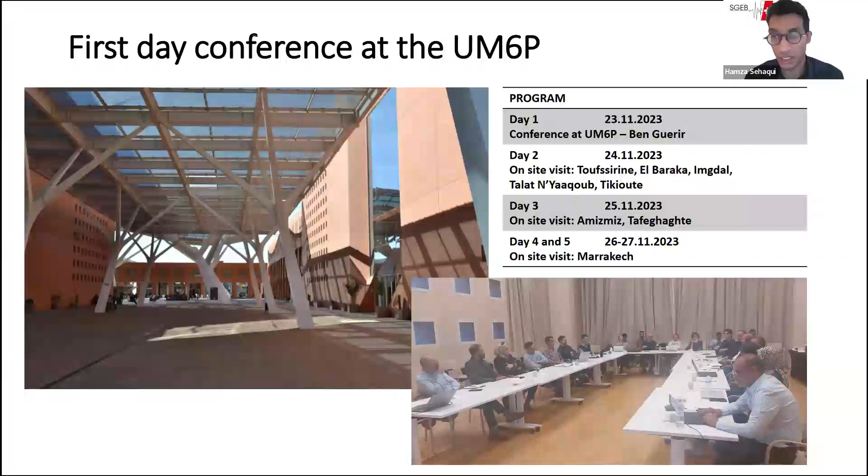Then during the following 4 days, we had the opportunity to visit villages that were badly affected by the earthquake, mainly within a distance of 10 to 40 kilometers from the epicenter. The second day we visited Toufssirine, El Baraka, Imgdal, Talat N'Yaaqoub, and Tikioute. The third day we went to Amizmiz and Tafeghaghte. And the last 2 days, we observed the damages and also some reinforcement measures in the old city of Marrakech.

Just as a reminder, the earthquake struck Morocco on the 8th of September 2023. The epicenter was about 70 kilometers southwest of Marrakech, with a magnitude of around 7. It was so strong that it was felt all over the country. And it happened at 10 o'clock in the evening, when a majority of people were at home, some already sleeping. There were more than 2,900 deaths and 5,600 injuries.

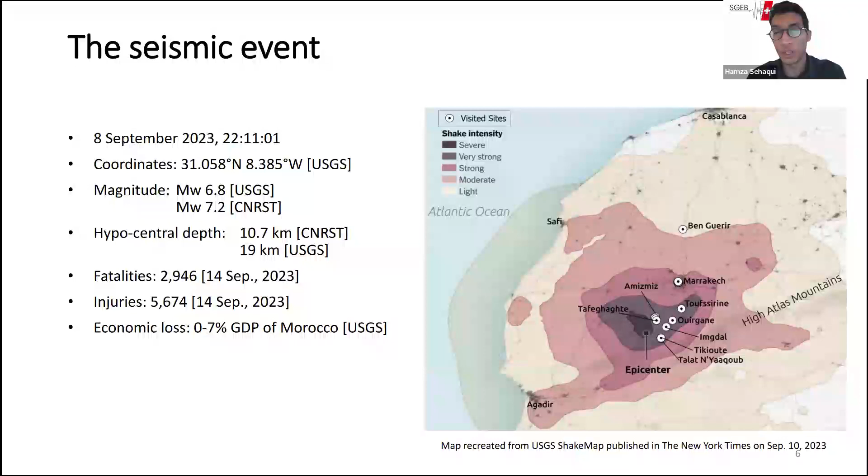Also, the location of the epicenter made the rescue a bit difficult, since it was in a region where access was really difficult due to multiple landslides over several kilometers.

For information, Morocco has seismic codes, actually two. Le règlement de construction parasismique, RPS, which concerns mainly concrete frames and mixed concrete masonry walls. More precisely, concrete frames with masonry infills. And the other code is the Règlement parasismique des constructions en terre, which concerns adobe and earthen structures.

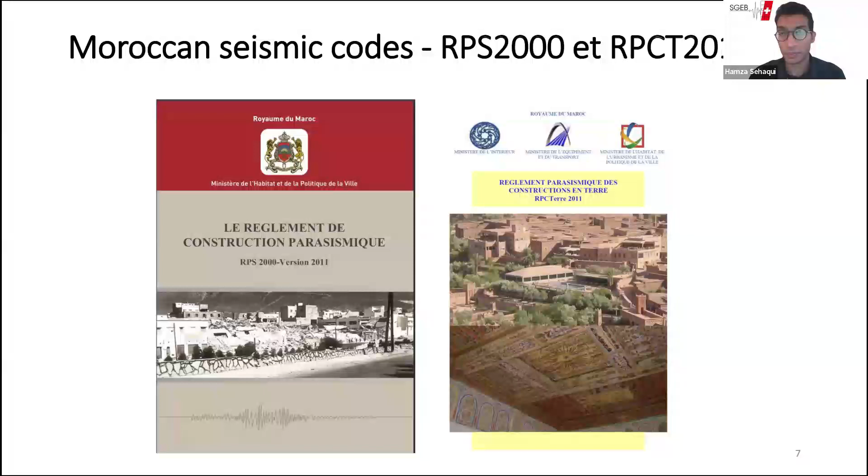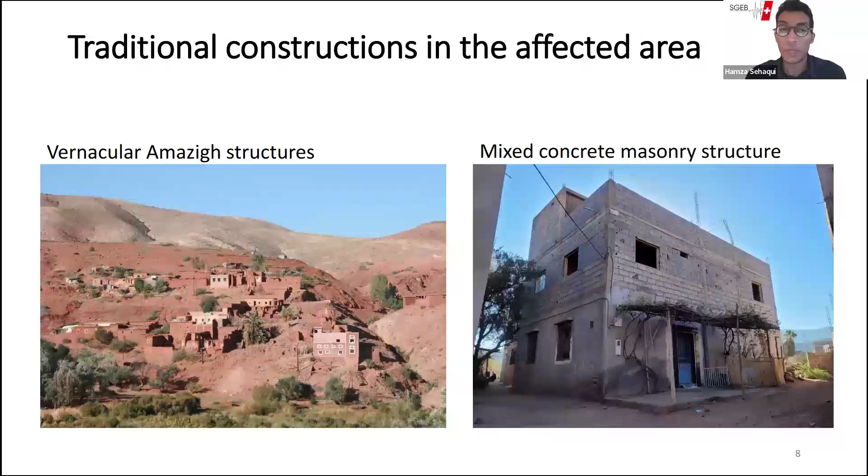Here are the most common constructions that we met in the High Atlas region. My colleagues will introduce these structures in more detail, but before that, Afifa from the Swiss Seismological Service at ETH Zurich will present the seismological and site aspects.

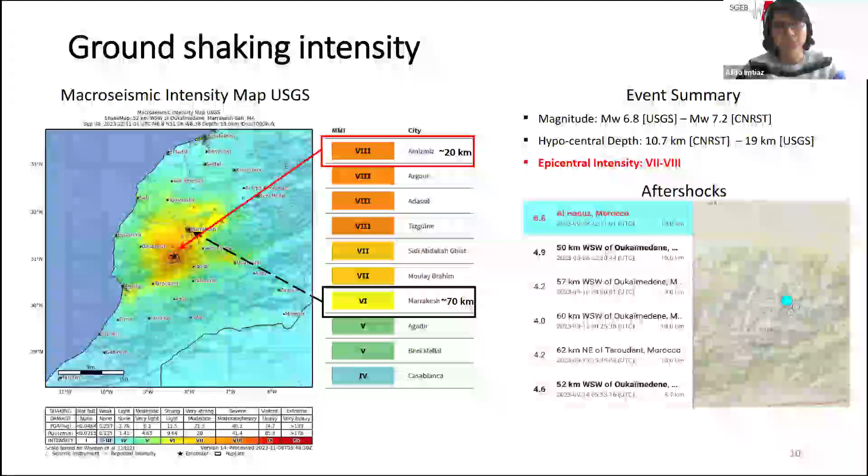On the right picture in gray circles, we see the locations of the aftershocks with magnitude above 4. The main shock was followed by a magnitude 4.9 aftershock just after 20 minutes, which also contributed to damage. Next is the PGA distribution.

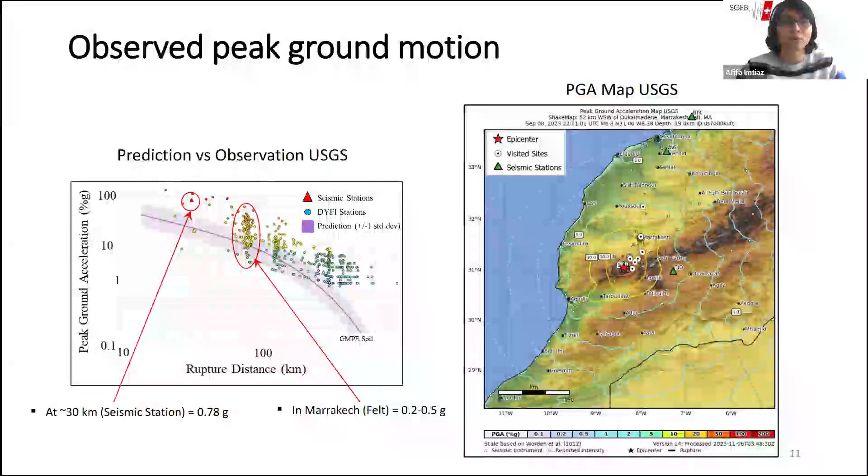So USGS compared the observed ground motions shown by circles and triangles on the left figure with the ones from ground motion prediction equations for soil, shown in purple. We see that the observations generally exceeded the prediction. The ground motion reached up to 0.78 G at a seismic station 30 kilometers away from the epicenter and was felt up to 0.5 G in Marrakech. On the right, we see that the sites we visited fall within 0.2 to 0.5 G contours.

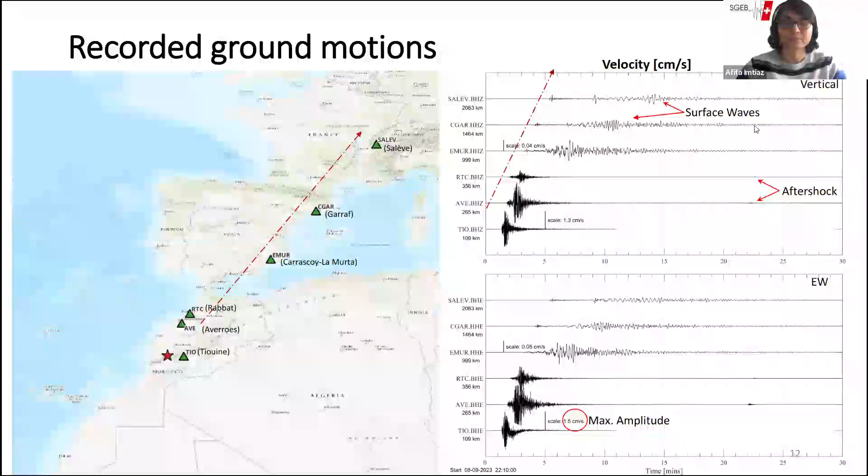Next, I show some recordings of the event. On the left, I show some stations from European networks. The closest station, Tiouine, is about 100 kilometers away from the epicenter and recorded a PGV of 1.5 centimeters per second. The 4.9 aftershock also appears on the seismograms. And as we go northwards from Morocco through Spain until Salève near Geneva, we can distinguish P, S and surface wave arrival phases more clearly. Next slide shows the response spectra comparison.

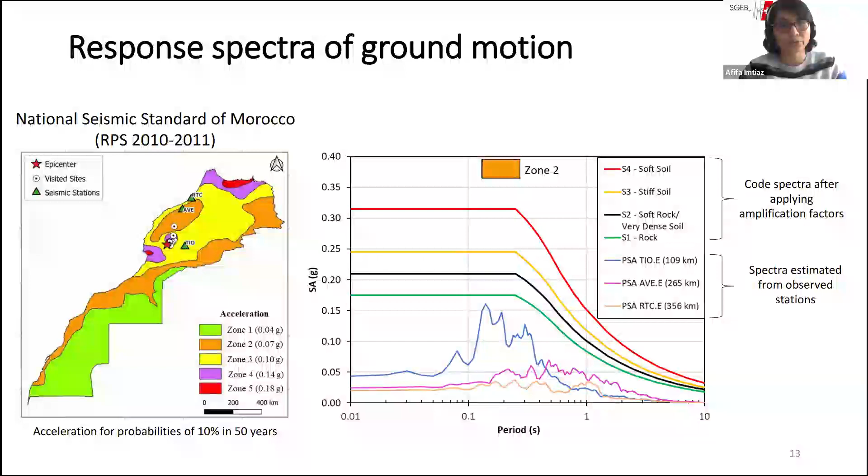On the left, we have the zoning map from the National Seismic Standard of Morocco. The epicentral area and the sites we visited fall in the moderate seismic zones 3 and 4. On the right, I compare the response spectra estimated from the seismic stations that we have recordings for with the design spectra of different soil types of zone 2. The closest station, Tiouine, exhibits a spectral acceleration peak of 0.16 G at 0.14 second, which remains below the code spectra. Next, we show the seismicity and seismotectonics at play.

Morocco is located at the boundary of the African and Eurasian tectonic plates, which are converging at 4 to 6 millimeters per year. This area is seismically active and has resulted in several damaging earthquakes. The map from Cheloni et al. 2024 shows instrumental earthquakes, major seismic events, and major tectonic lineaments of the area. The Al Haouz event occurred in the west part of the High Atlas Mountains, about 550 kilometers south of the plate boundary.

In the High Atlas, the seismicity is low, but it has produced the 1960 magnitude 5.8 Agadir earthquake, which destroyed the city and was the strongest seismic event until 2023. Several active reverse faults exist there, but the deformation rate is less than 1 millimeter per year. In a reverse fault, the fault motion is caused by compressional forces, which results in crustal shortening, that is elevation of terrains by the thrusting of one block of crust over another. So the Atlas chain may take longer, but it seems to be able to generate a large magnitude earthquake.

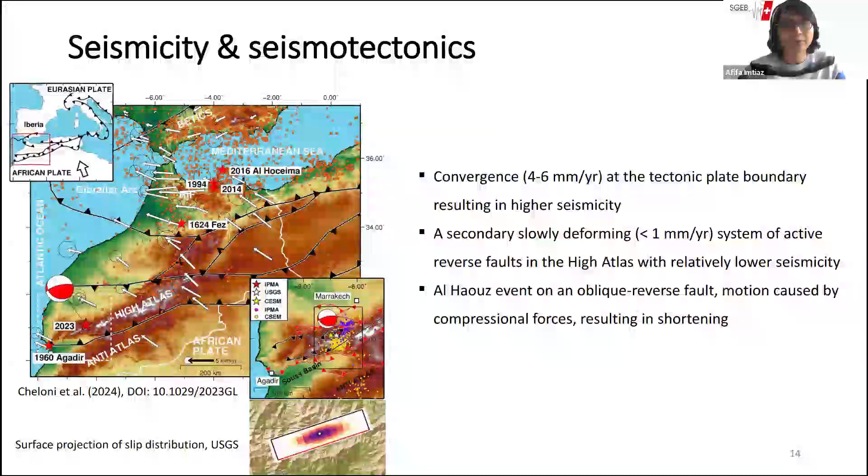The smaller boxes on the right show the main shock, the aftershocks, the moment tensor, and the surface projection of slip distribution. And we see that this event is an intraplate earthquake that occurred on an oblique reverse fault with north-south compression. As no surface faulting was observed, the exact fault mechanism is still not well understood. Next.

So why was the Haouz event so deadly? Multiple factors have contributed. The first was magnitude. At 6.8, the earthquake wasn't huge, but it was unusually large for Morocco. A further complication was introduced by source complexity. The damaged villages were located within close proximity of the source, and buildings were not earthquake resistant. So based solely on our visual inspection, without analyzing any seismological or geophysical data, we try to examine if site effects could also be important in amplifying ground motions.

So next we go to the geology. The area we visited falls into the Haouz Basin, which is formed of tectonic sedimentation with tertiary and quaternary formations resulting from the erosion of the High Atlas chain. It consists of younger alluvial deposits, which makes it susceptible to complex site effects from a combination of topographic and basin effects.

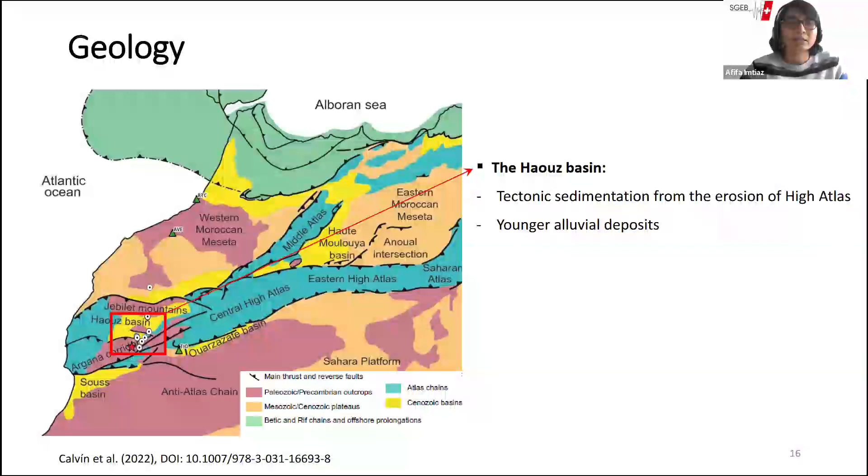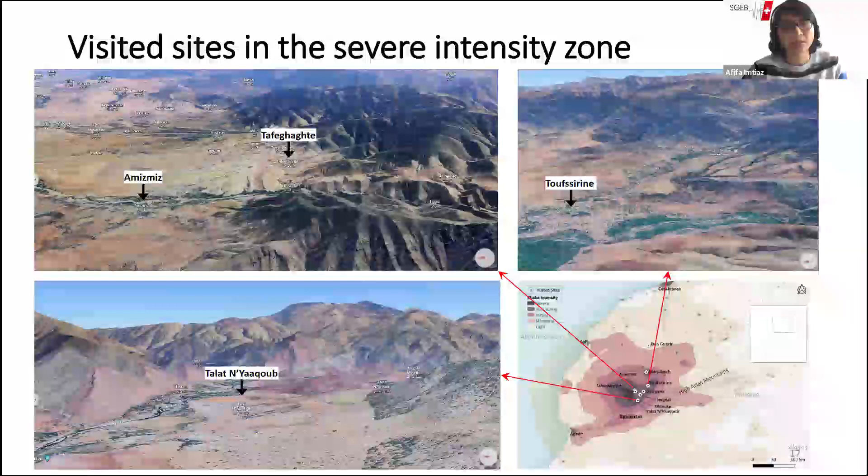So next, we have a look at the most damaged villages. We can see that villages like Amizmiz, Talat N'Yaaqoub, Toufssirine, and especially Tafeghaghte are located at the mountain foot and mountain fringe areas where the greatest concentrations of damage occurred. We know that topography influences ground motion and in general increases the amplitude of shaking at ridges and could also impact surrounding low-lying areas.

So next we go to the area we visited in Amizmiz. From the satellite image after the event, we can see relatively more damage on the right side of the street marked by the red zone.

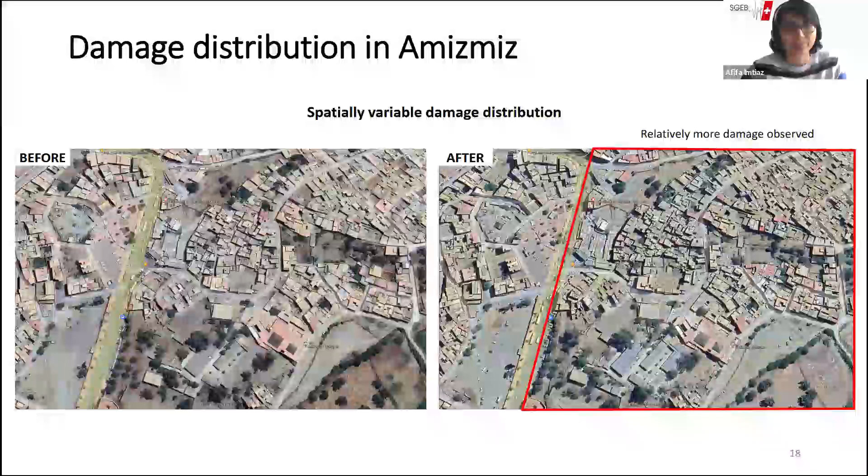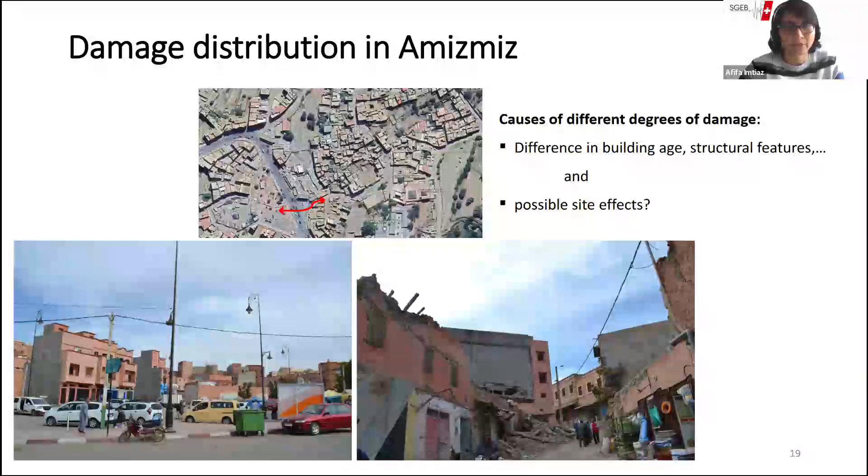And in the next slide, we try to see the state of the buildings on left and right side of the street. The apparently undamaged looking buildings on the left might be relatively new and may have sustained internal damage that we haven't inspected, while the buildings on the right side are located on a mild slope. So we ask ourselves if site has contributed to the ground motion amplification or resonance in this part.

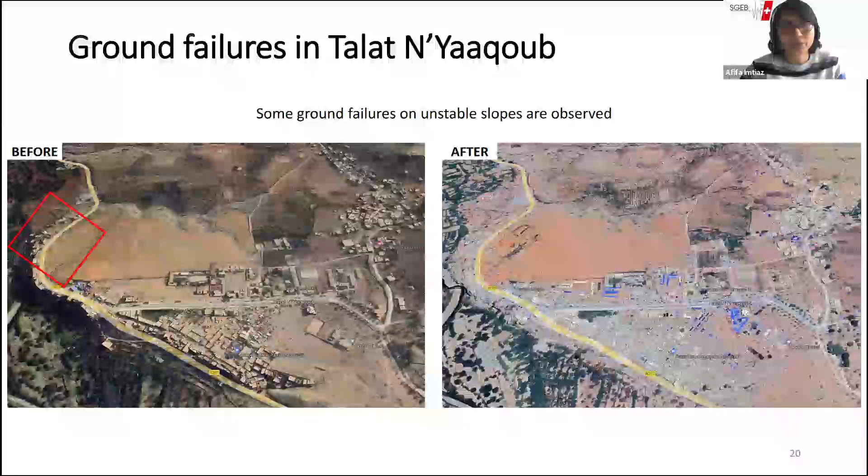Then we go to the before and after picture of damage in Talat N'Yaaqoub. We can see rows of buildings constructed on the slope. The area in red rectangle is zoomed in the next slide. So we have observed ground failures and long cracks near the buildings on the slope.

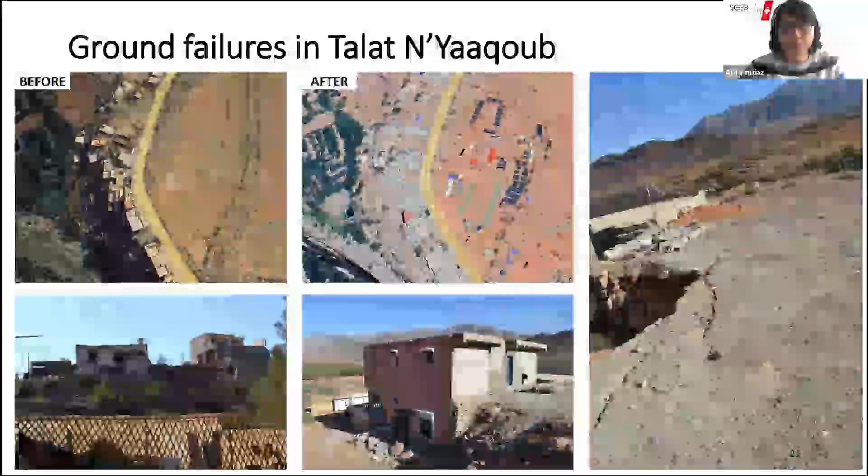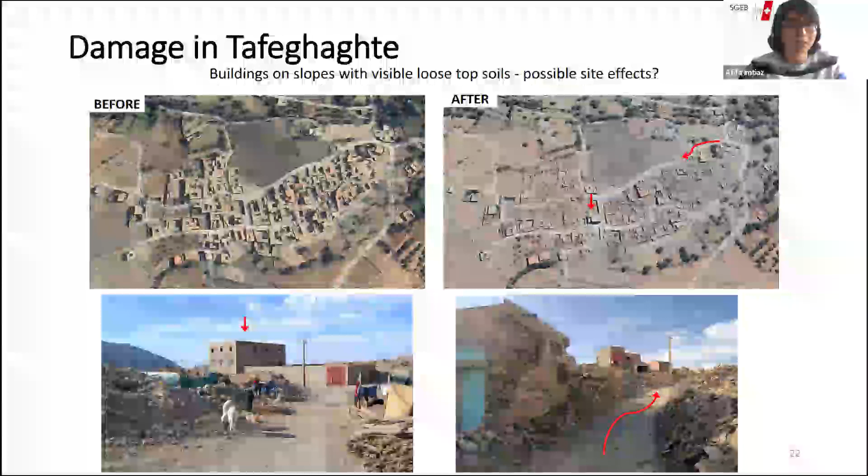Then we go to the next village, Tafeghaghte, which was completely leveled by the earthquake. It's located on slopes right at the foot of the mountain. The topsoil looked quite loose. Again, we ask ourselves if some complex site effects or resonance effects have also contributed to the amplification of ground motion here.

And then next we go to rock hazards. Severe rock falls have been caused by this event. The fallen rocks were already cleared by the time of our visit. However, we observed some of the debris near steep exposed slopes, which seem highly susceptible to ground shaking generated by the likes of the Haouz event.

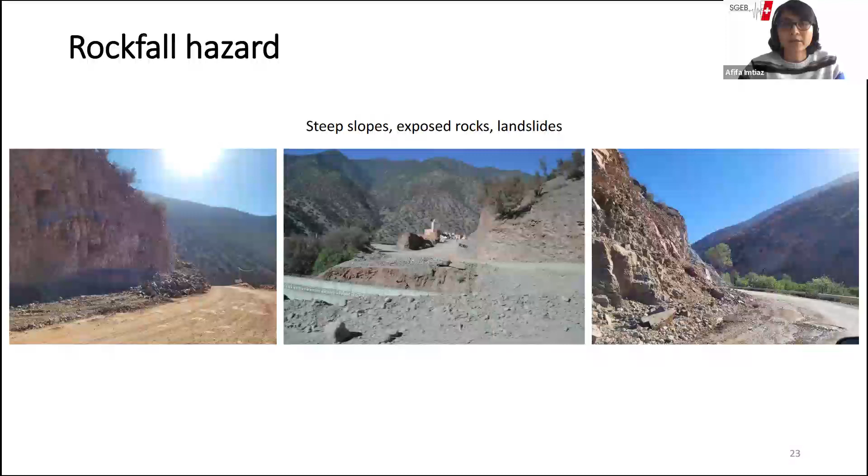So that's all from me. Thank you all. And next, my colleague Gustavo Cortés will present the context and disaster response aspects from our mission observations. Hi, everyone. Thank you, Afifa.

Our mission was an opportunity to learn from observations, as you will hear from some other of our colleagues, but also to test our Swiss building assessment form, including a newly developed digital platform, which basically lets you use your smartphone or a tablet. But let me start by briefly discussing the seismic response and disaster management cycle.

The acute phase, which happens right after the event, includes search and rescue and takes place right after the event, those first few days. In this, suddenly people are basically helping each other in a spontaneous way. But as days go on, there's a more organized help that normally takes place, and that's where the government starts to help, other non-governmental organizations as well support. And people in general, they need healthcare support, drinking water, food, shelter, hygiene items, etc.

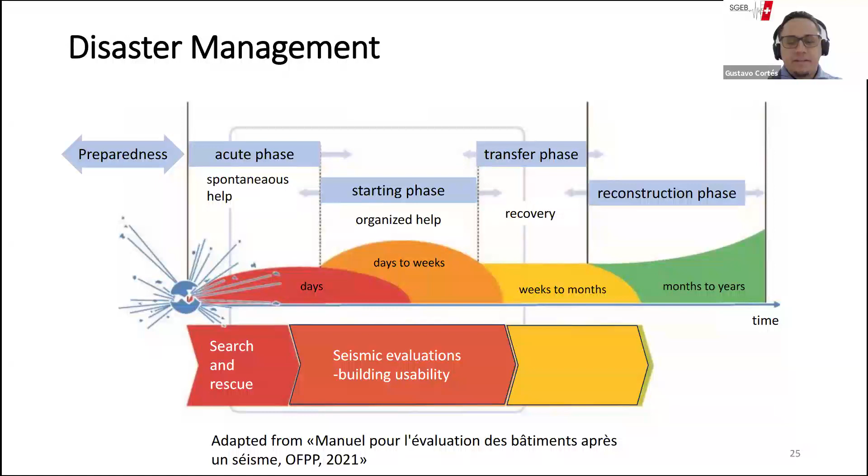Lastly, but not least, let me just say that preparedness that you see on the left is quite important as well. This phase includes not only response planning, a lot of things have to be planned ahead of time, but also it means disaster risk reduction and what things can we do now to try and reduce the risk for when an event happens. If we go to our next slide, please.

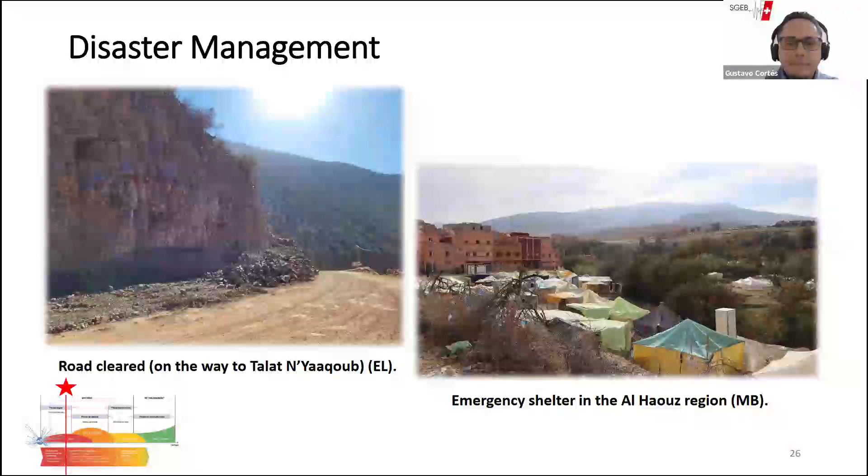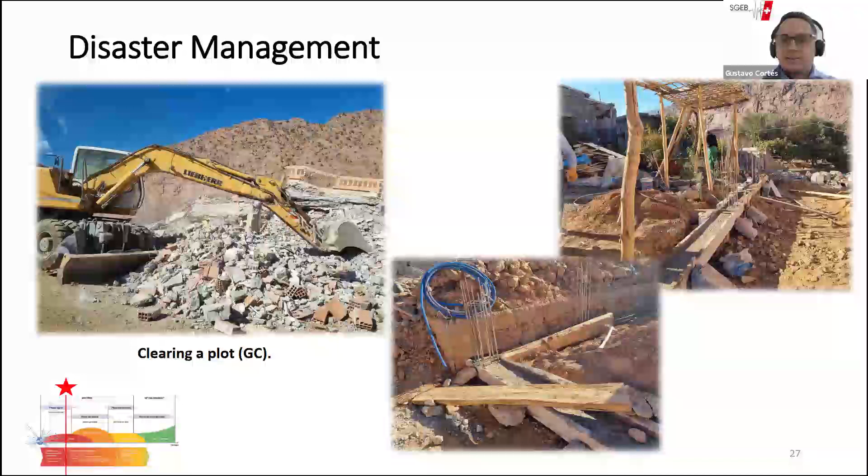On one side, you had people clearing the plot. On the other side, you have people already trying to recycle some of the pieces that they could recycle, they could reuse, and starting to pour concrete and start some kind of new house. If we go to the next slide, please.

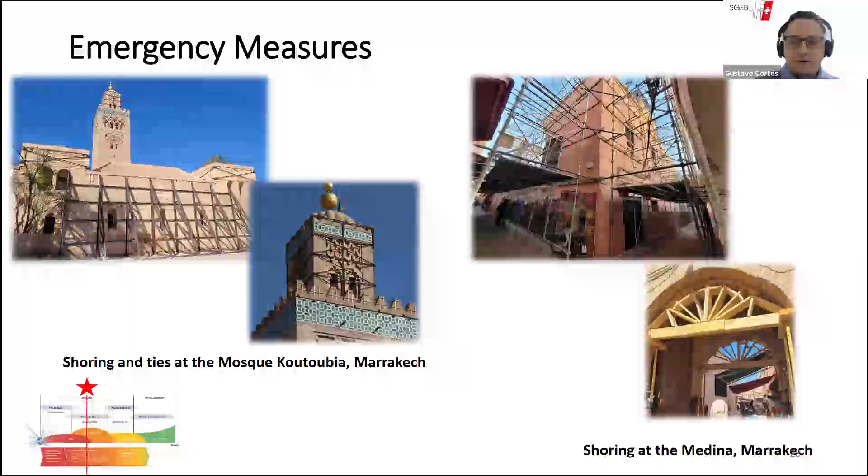On the right, I have a couple pictures showing some examples. As we went to the old Medina, some of those small roads, small streets had been protected. In that case, some of the buildings had been shored to protect them, and also to protect people as they pass under, because, you know, life has to continue. If we go to the next slide, please. Can we go to, well, thanks.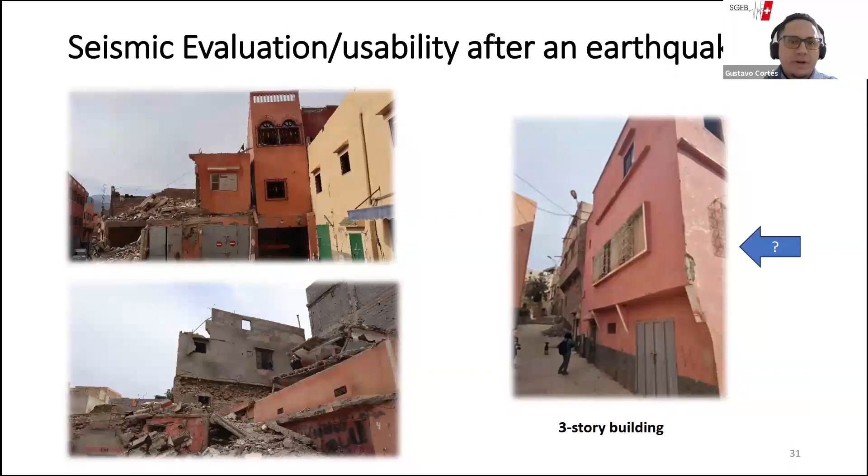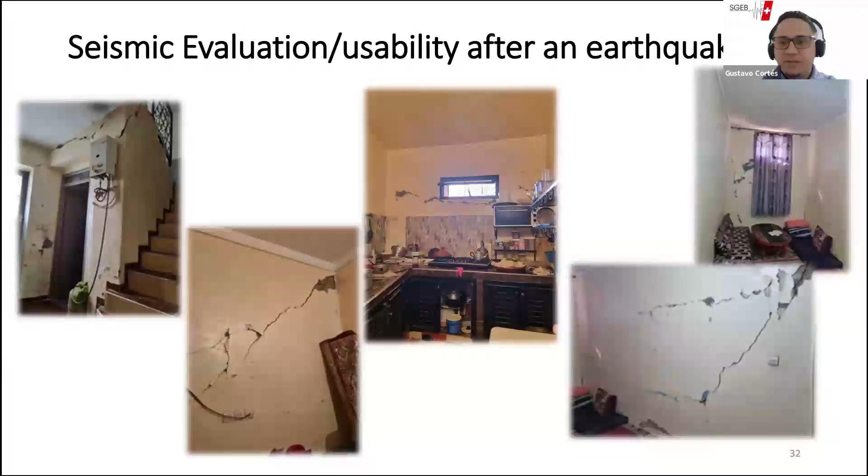However, the form is really mainly for those buildings like the one you see on the right, where looking from the outside, you don't really see as much damage. But as we went inside, if we go to the next slide, you'll see the significant damage that took place in that same house, which from the outside you wouldn't tell was that damaged. So we used the assessment to evaluate this building. Like I said, it's more in the report, but again, let me go briefly through some of the main sections.

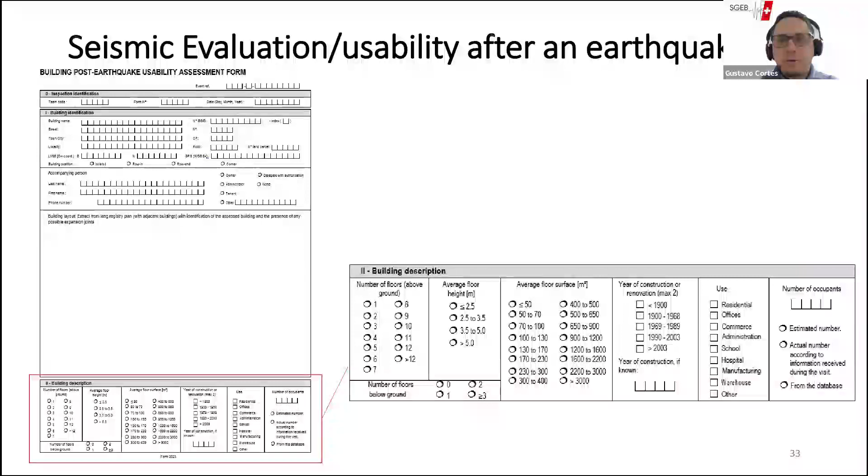On the top left, basically we have to have the information about the building so we can go back to the building and we are able to identify it. On the bottom part, we normally have to record the number of floors, average height of the floor, the surface, year of construction if we can know that, and then what's the use and how many people live in that house. Please go next.

And this part is perhaps more interesting for the engineers among us here. We look at the lateral force resisting system here. We identify that; that's sort of the top left portion of the table. But then we also look at whether we have a flexible diaphragm or a rigid diaphragm.

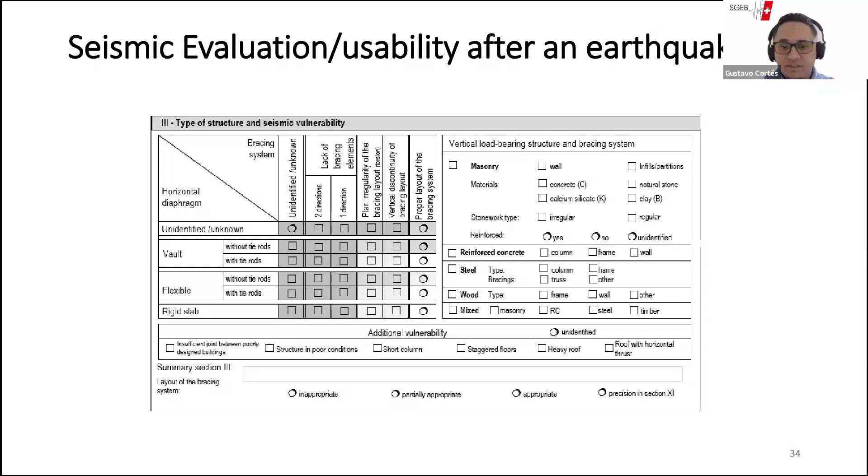We also record what kind of materials were used. Is it masonry, reinforced concrete, and so on? And if there's any vulnerability, then we want to make sure that we capture those, such as a short column and so on. Next slide.

The next part that I'd like to briefly show is that we also try to estimate the level of damage. And for that, we use the European Macroseismic Scale that goes from grade 1, which is negligible, to slight damage, all the way to grades 4 and 5, which is very heavy or complete destruction.

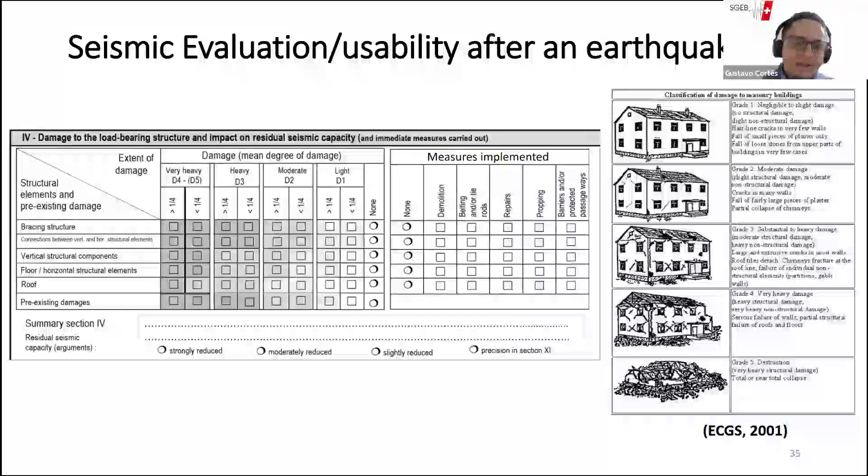Next slide, please. Once we have gathered all of the information, again, I'm not showing all the sections, okay? But this table here is sort of a summary which allows us to determine whether the building can be used, that's the green, whether it should not be used whatsoever, that's the red. And then if it's somewhere in between, that's the yellow. That means that there are some immediate measures that need to be taken before anyone can use it, or we couldn't determine as engineers in this basic assessment whether it can be used or not.

So let me finish with this last sentence here. The question that we posed to the engineers in charge of the assessment is this: will the occupants be safe if an aftershock of similar intensity occurs in the vicinity of the building being assessed?

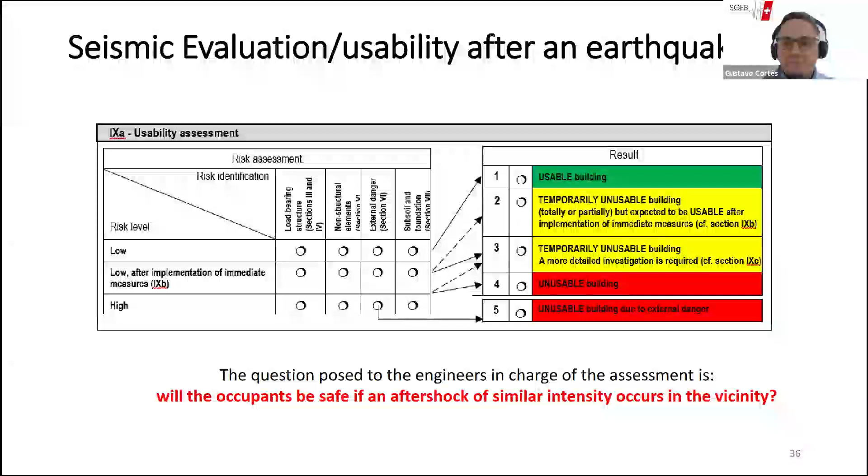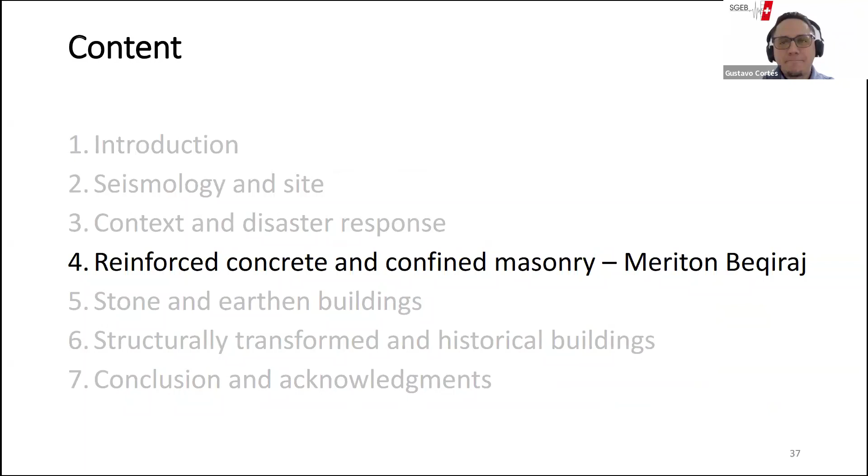Thank you very much. Now I pass it on to Meriton, my colleague, who will talk about the reinforced concrete and confined masonry observations. Okay, thank you, Gustavo, for your presentation. So now I'm going to add a few comments on reinforced concrete and confined masonry buildings.

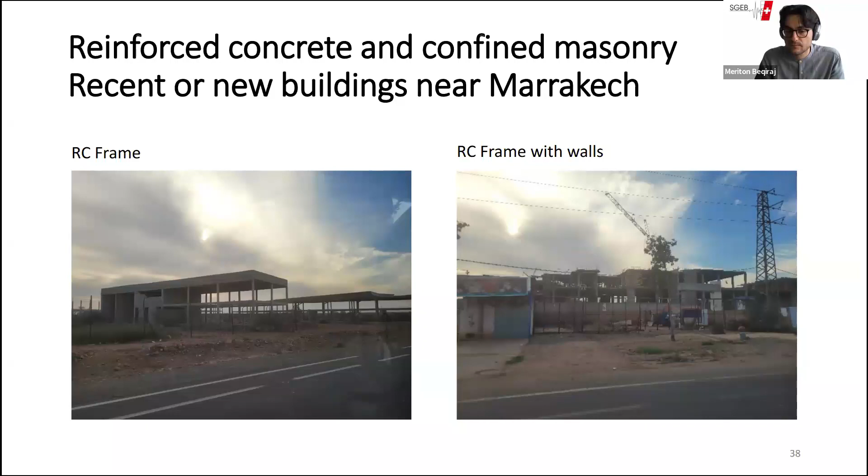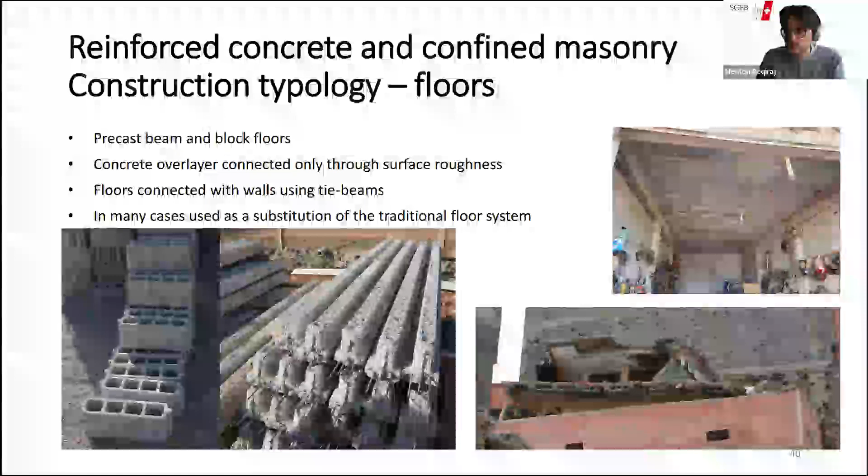Now moving forward to describe the floor system. This was also a very common type of floor system. They use mainly precast reinforced concrete beams. And on top of that, they use concrete blocks to form, as we can see on the top right picture, some floor systems. Usually on top of these elements, there was also an overlay of unreinforced concrete, which was connected mainly only with the surface roughness of the beams. And then the floor is connected to ring beams and columns.

So the typology I described there was very, very common, and we could see that in many buildings, buildings that could be also 4 or 5 stories. So let's start here with the first case study, which appears to be more of a confined masonry type, because in this kind of buildings and typology, the big question was always if it behaved like confined masonry or rather as standard reinforced concrete frames.

This first example was in Talat N'Yaaqoub, so quite close to the epicenter, and we can assume that it behaved as confined masonry mainly because we can identify a compression strut in the wall in the middle picture. However, we can also observe that the principles of confined masonry are not really here. For instance, the concrete elements are not really suited for load-bearing walls. Around the openings, we do not see vertical elements, and also the interlocking between the walls and the tie columns is not really present, even though likely the columns were cast before the walls.

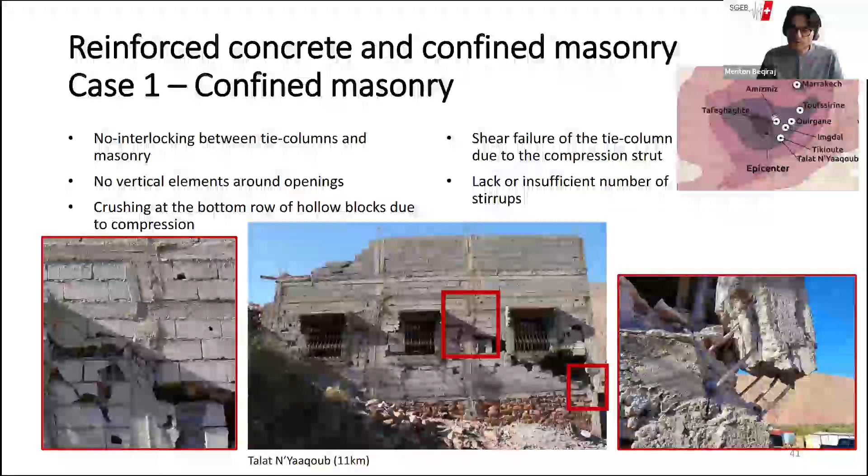And then moving forward to the next one. Actually, this one is very close to the previous one. It's right next to it, and looked similar at first glance. However, we identified this one as behaving more as an RC frame, the main reason for concluding that being the fact that on this facade, it appears that the infill walls fell out of plane. We could also observe that in a way on the left picture.

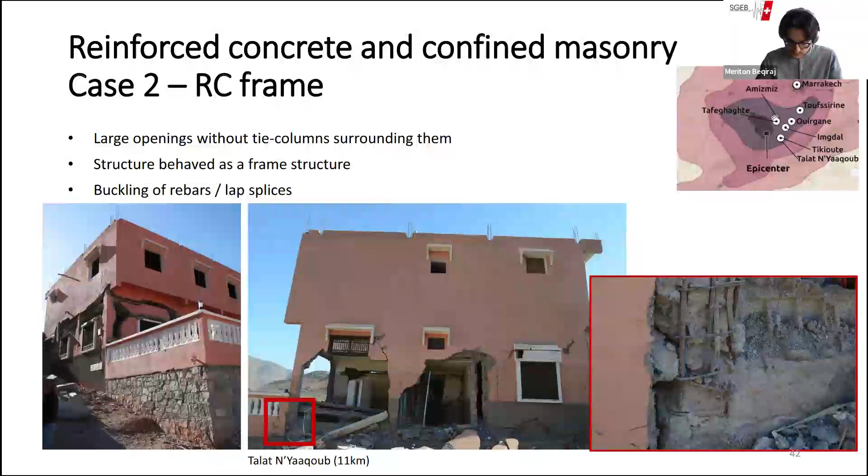So in terms of failure mechanism, what we observe here is a little different from the previous one. The amount of stirrups looks to be greater than the previous one. However, we do also see some lap splices and local buckling of the rebar, as well as concrete spalling. So these two cases were really representative of many damages we could observe, especially in Talat N'Yaaqoub, but also in many other villages.

Here, just something I wanted to point out. This is actually right across from the same building I just introduced to you. And what it shows is an out-of-plane failure of this infill wall, which was exacerbated by the earth pressure. So this is specifically something interesting, because of the fact that the building was on a slope.

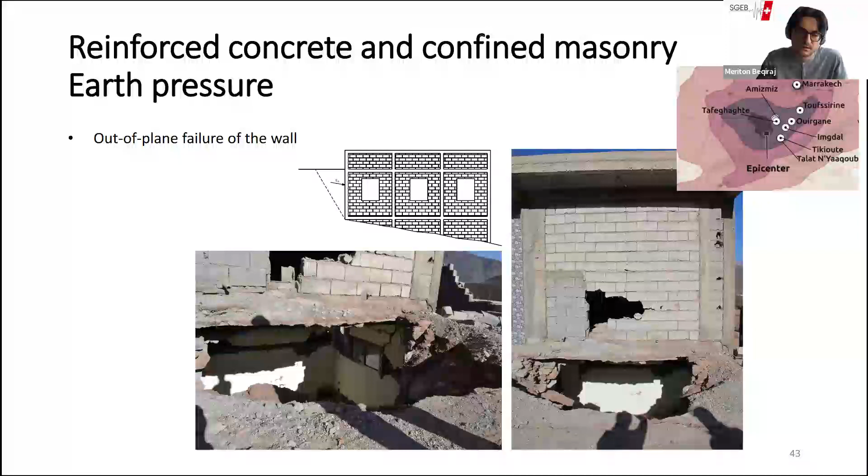Now to conclude, I wanted also to mention that we discussed these kinds of failure mechanisms, but we could also observe very heavy structural damage, especially in the center of Talat N'Yaaqoub. And especially some soft story mechanisms at ground level for these kinds of structures made of reinforced concrete and also confined masonry. So those were the observations that I could make for this type of buildings.

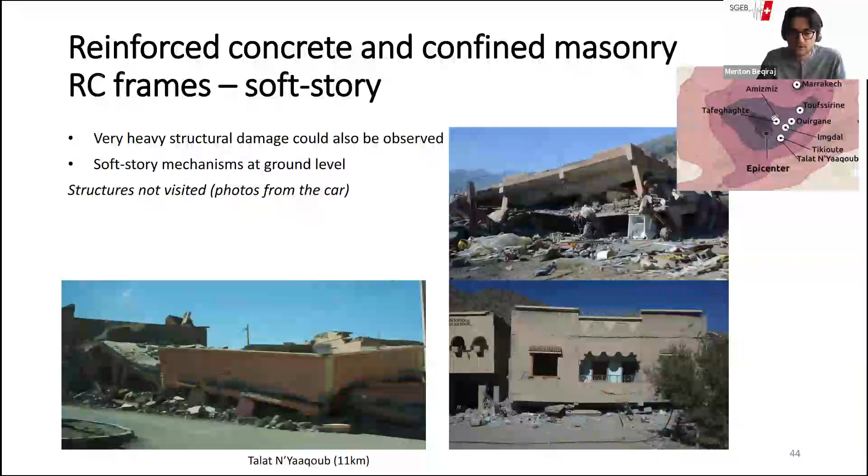We're starting with vernacular stone masonry buildings. In this slide, we summarize the structural characteristics of those vernacular structures. These presented in the visited areas 1 to 2 stories. The floor system was made with vernacular flexible floors that we are going to look into in detail in the next slide. And in general, we can say that these buildings were lacking seismic design characteristics, such as robust wall-to-wall connections, wall-to-floor connections, or regular distribution of openings.

As we can see in the figure in the middle at the bottom, we also observed in many cases structural variations or transformations that these structures have experienced during their lifetime, with the addition of modern floors from reinforced concrete elements or beam and block floors, as Meriton presented previously, as well as the addition of vertical reinforced concrete elements like reinforced concrete columns and horizontal ones like tie beams.

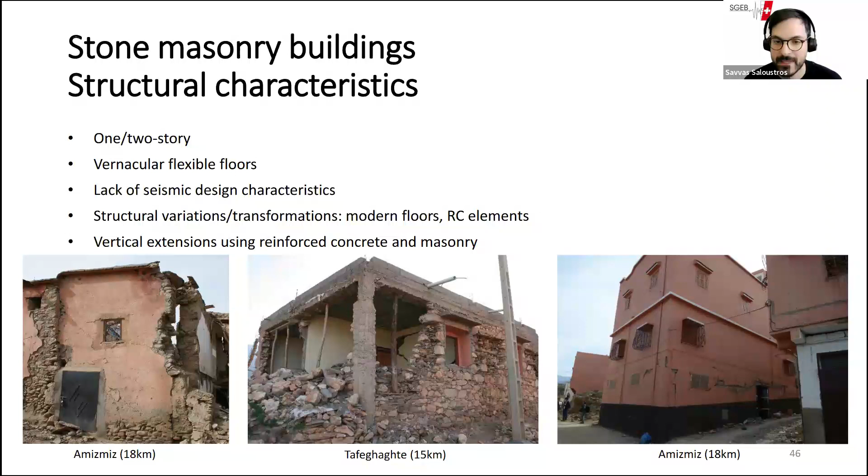On the right figure, we see an intervention which corresponds to vertical extensions using modern materials such as reinforced concrete and block masonry, which was really common in rural areas like the city of Amizmiz.

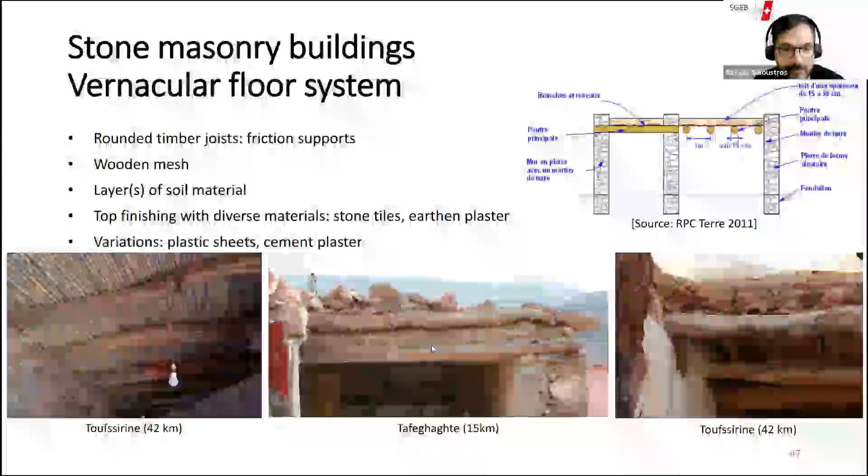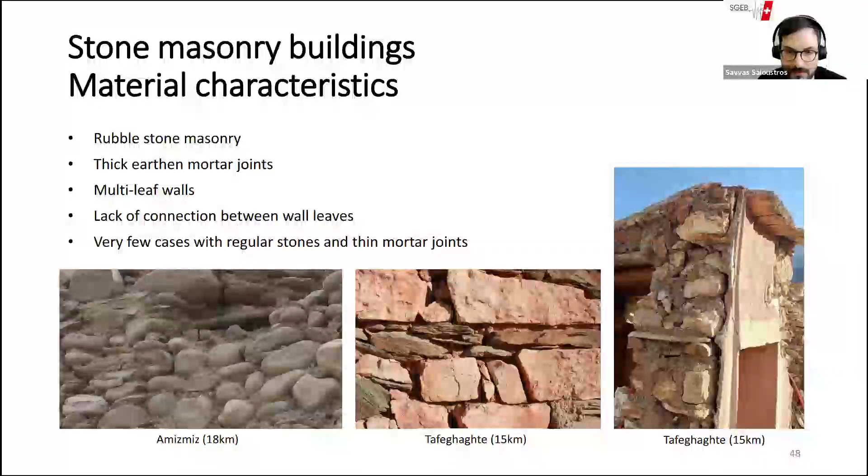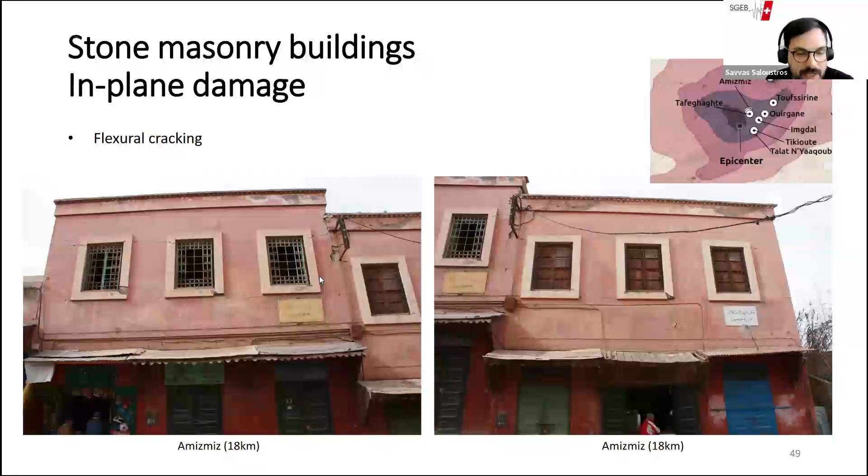Actually, these buildings were among the few that were still in use in the old city of Amizmiz, which means that they performed much better compared to the neighboring ones. And we can attribute that to the regular distribution of openings, as well as the better quality of masonry, as we could observe from some local loss of plaster.

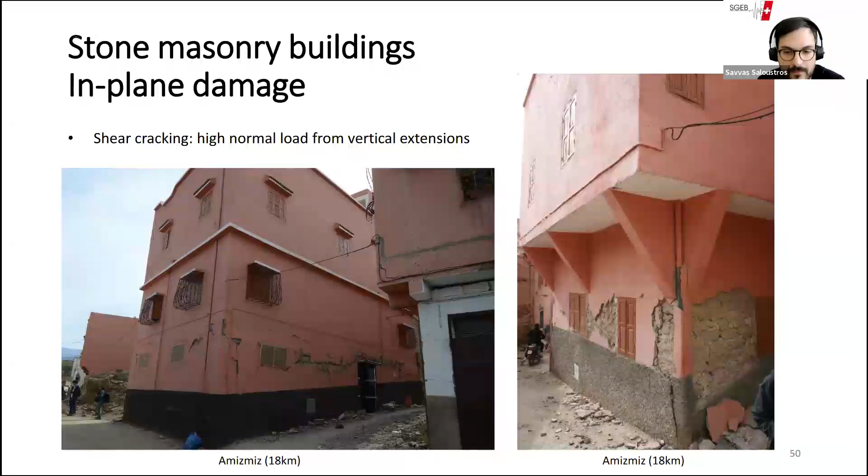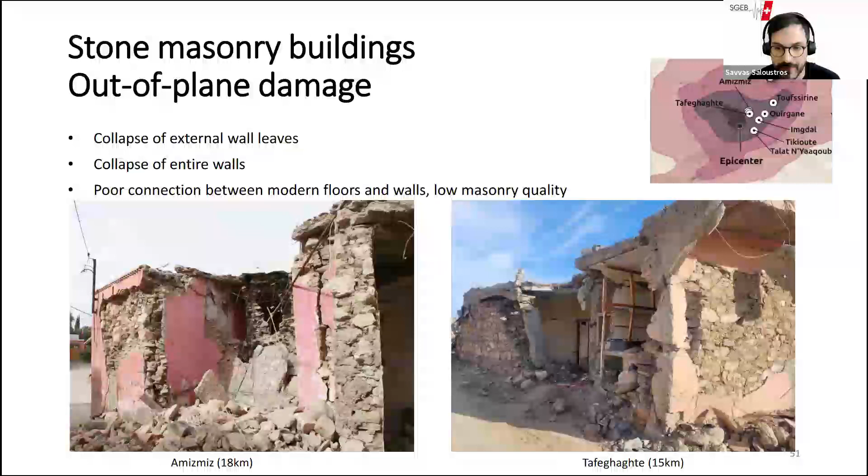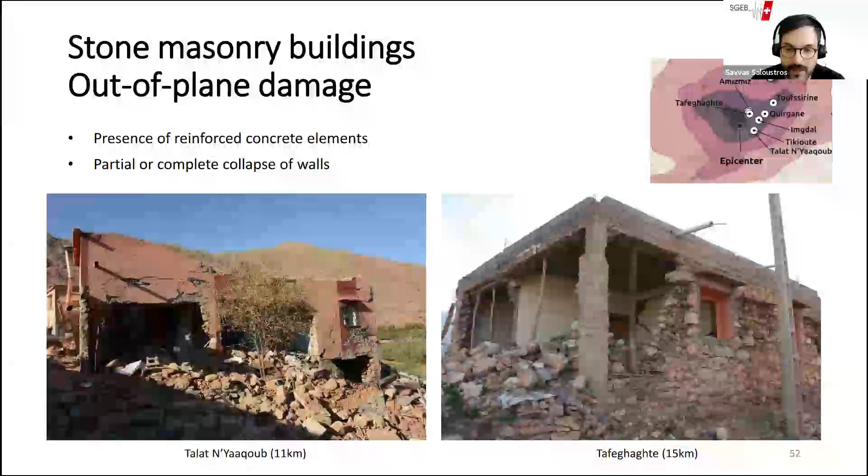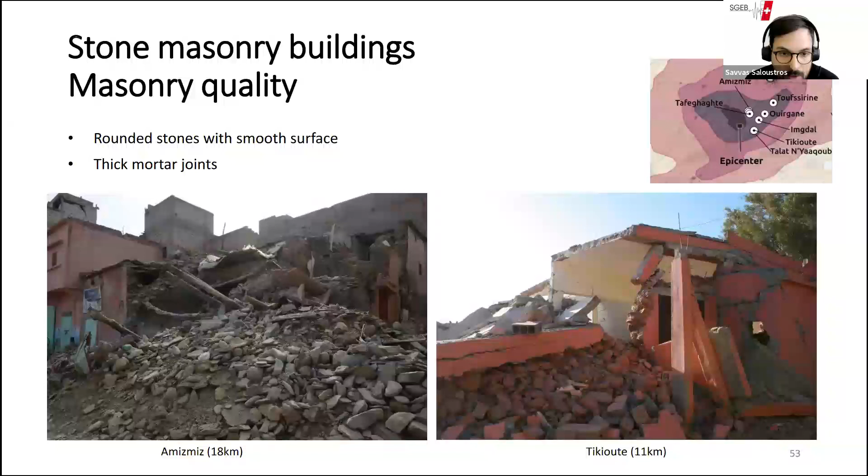This masonry typology has poor interlocking and also low frictional strength, which actually resulted in complete disintegration of walls during the earthquake loading. And as you can see on the right, the addition of modern floors would not improve, and could even worsen, the behavior of this type of buildings.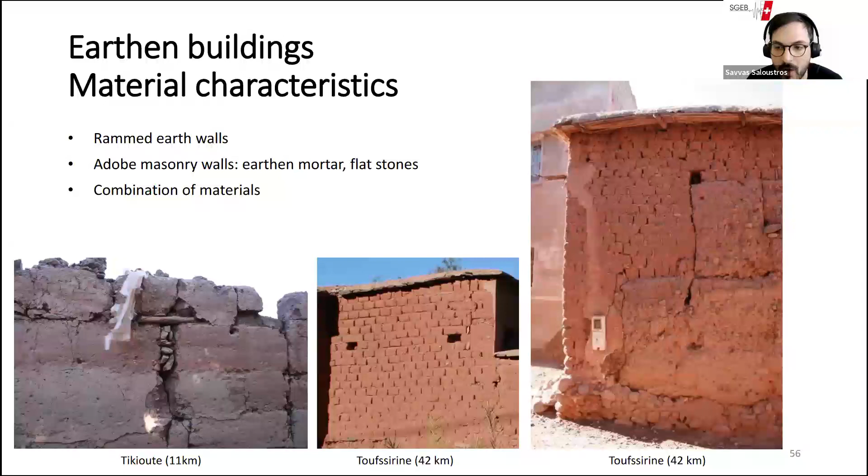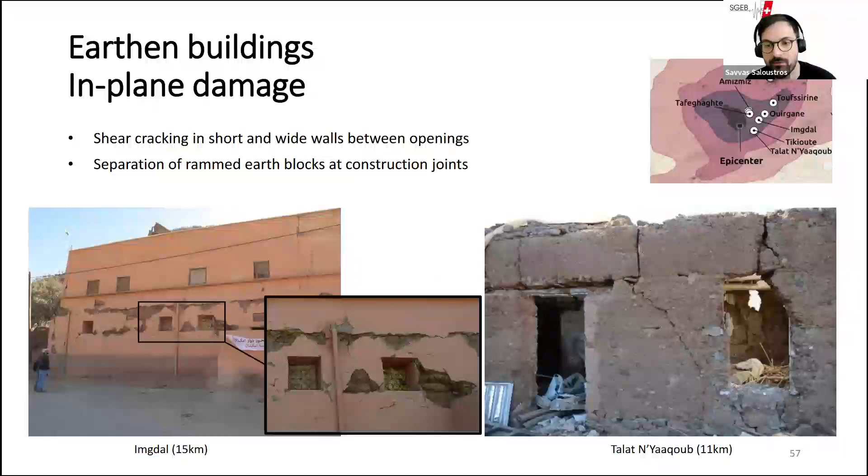Moving now to the damage typologies, and starting with in-plane damage, here we see the case of two buildings, one in Imgdal that my colleague Mylène will present later in more detail, and one in Talat N'Yaaqoub, where we observed shear cracking in short and wide walls, mostly between openings. And a common characteristic of rammed earth buildings was the separation of rammed earth blocks at construction joints. So this proved to be a point of vulnerability in rammed earth buildings.

Moving to out-of-plane damage, one of the most typical damage typologies was vertical cracking and separation of orthogonal walls. This is attributed to the low strength of adobe and rammed earth, but also, as I said before, to the lack of connection between orthogonal walls and the presence of construction joints that we can see on the right, which actually facilitated this damage typology. And on the right image, we can see a singular case where we could observe the presence of a timber element providing some connection between orthogonal walls in a rammed earth building.

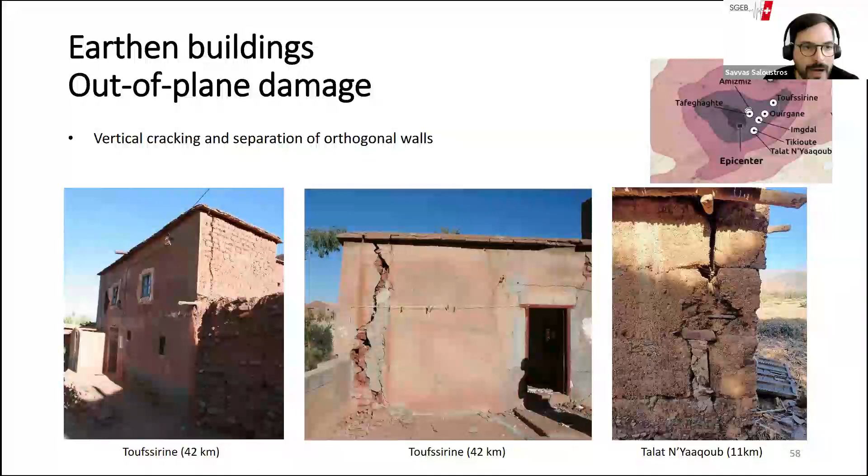Apart from this lack of interlocking, another factor that has contributed to the wall overturning and collapse of many earthen and stone masonry buildings is the type of floor used. One-way floors leave two sides of the rooms unloaded. So the walls that were unloaded, typically facades, didn't have the stabilizing normal force from the floors, and were more susceptible to out-of-plane failure, as we can see in the two images in the bottom left and in the middle.

And finally, on the right side, we see the collapse of a corner building in a building aggregate, which demonstrates all the structural vulnerabilities of these aggregates: the connection between different materials, the lack of connection between orthogonal walls, as well as the vulnerability of the floor system. We see that the floor beams completely slipped out of their position in the first floor.

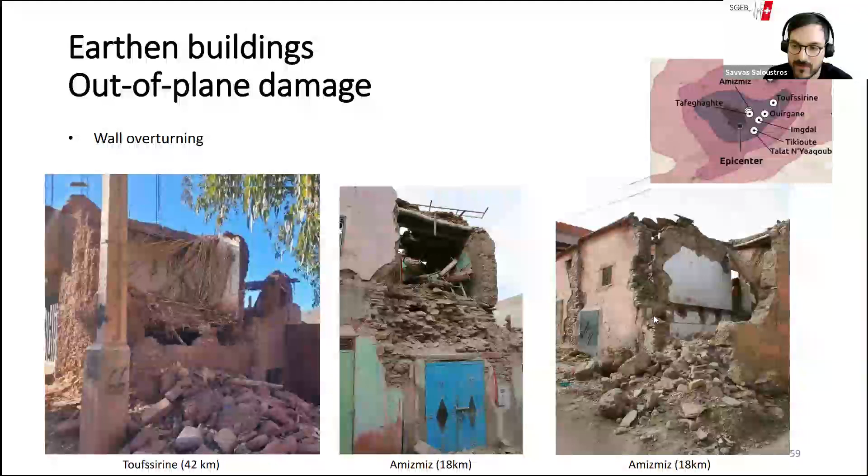And with this, we close this part and we move to the next part related to the structurally transformed and historical buildings by my colleague Mylène Devaux.

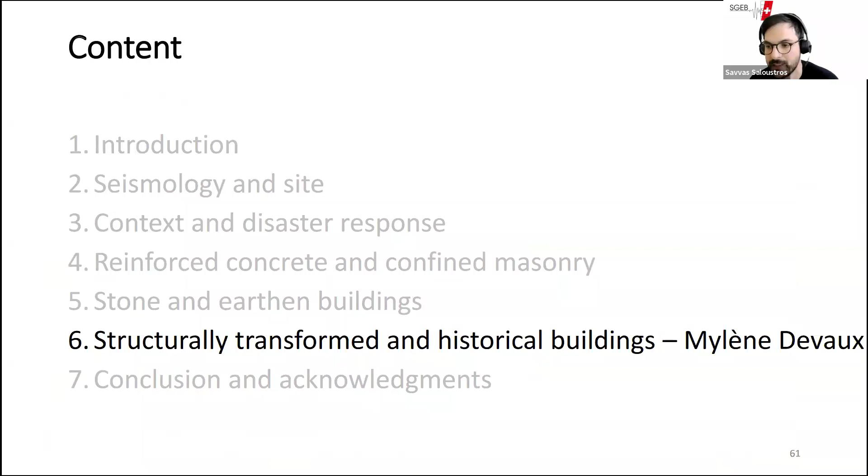So during our post-seismic reconnaissance mission, we recorded that many of the observed buildings had been once or several times transformed, for example, raised or extended. This fact has already been highlighted by my colleague Savvas in his presentation before mine, who has shown several cases of natural stone masonry buildings or adobe buildings that have been transformed with reinforced concrete elements, for example, RC frames and/or reinforced concrete slabs. So to keep on with this topic, I would like to present a few other cases of conversion that are more or less representative of what we saw on site.

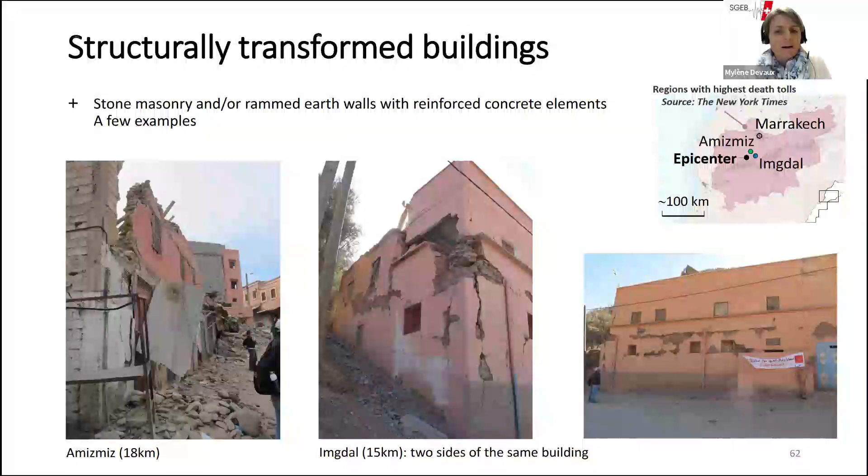Both situations you can see on this slide involve buildings that were initially built in natural stone masonry or with rammed earth blocks. The building you can see on the left was converted with reinforced concrete elements, maybe you can show the next slide. Thank you. Reinforced with reinforced concrete frames with masonry infills, for instance, or confined masonry.

It's always quite difficult to identify if it's confined or masonry infills. And on the other two pictures, you can see the other building on the right, which was converted in one step with natural stone masonry. You can see it quite in the middle of the building's height, about 1 meter high, and on top of it, another step of conversion, with reinforced concrete elements with masonry infills.

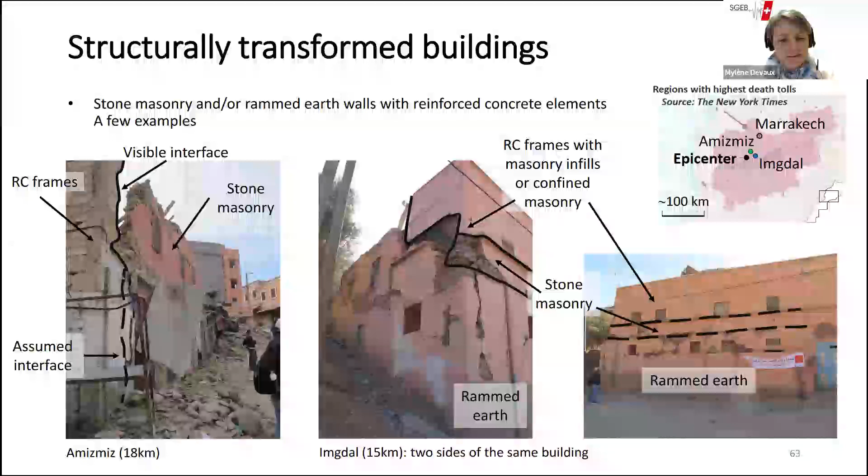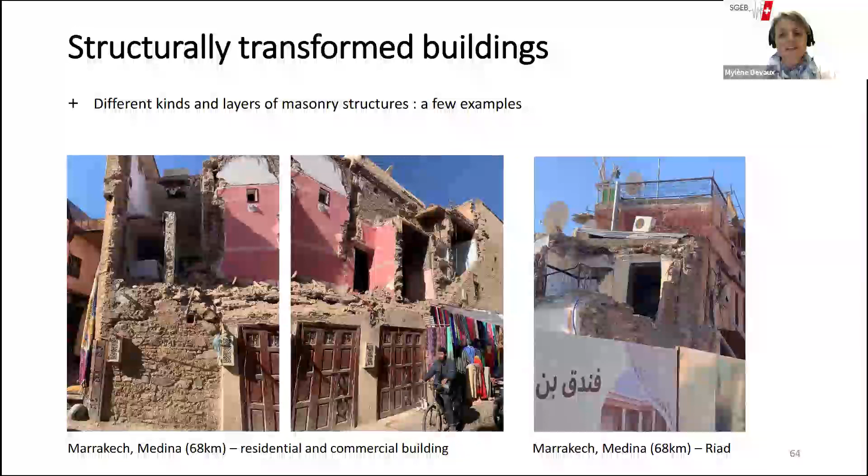I also would like to present two other situations of buildings on the next slide, whose structure is composed of different types of materials. For example, in the picture on the left, and also in the middle of the slide, we can see a building whose structure combines natural stone masonry on the ground level and adobe masonry on the first floor level, and also heavy horizontal elements that look like RC slabs or reinforced concrete floors.

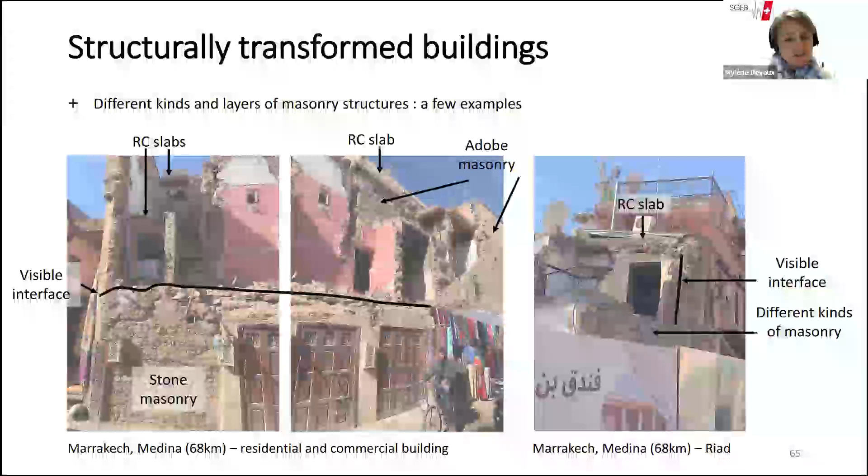They are really heavy floors, and they were most certainly built as part of a conversion, because we can also see other traditional floors in this building. It's maybe a little bit more difficult to see, but we can observe them. That's why we can assume that this building was quite highly converted.

So once again, the observed damage shows that the areas where the materials change, which I've called interfaces, correspond to areas of weakness and may highly contribute to the ruin mechanism that has been set in motion here. In this case, it is highly likely that the upper part of the wall collapsed according to an out-of-plane mechanism whose base surface corresponds to the interface between two types of masonry, in this case between stone masonry and adobe masonry.

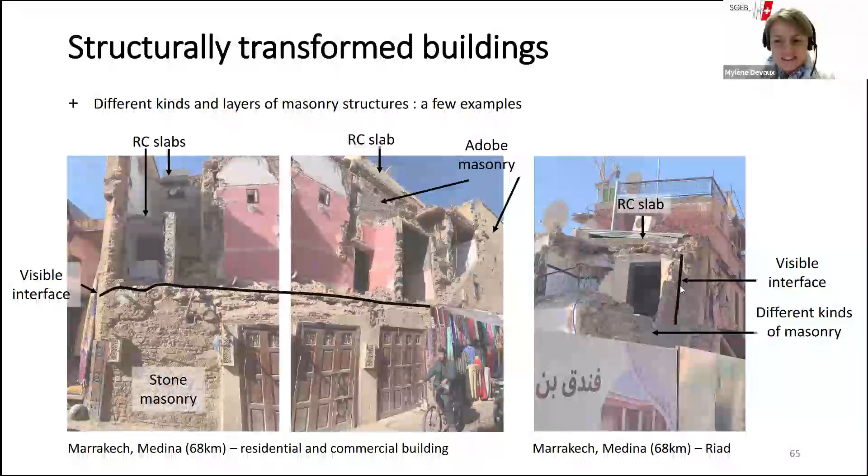In the case of the Riad building, which is on the right in the picture, we can see, among others, that there are two layers within the wall thickness, with no apparent connection between them. Once again, this must have had a major influence on the out-of-plane vulnerability of this wall. Both buildings are located in the Medina of Marrakech, and this allows me to make the link with the following slides, which deal with historical buildings.

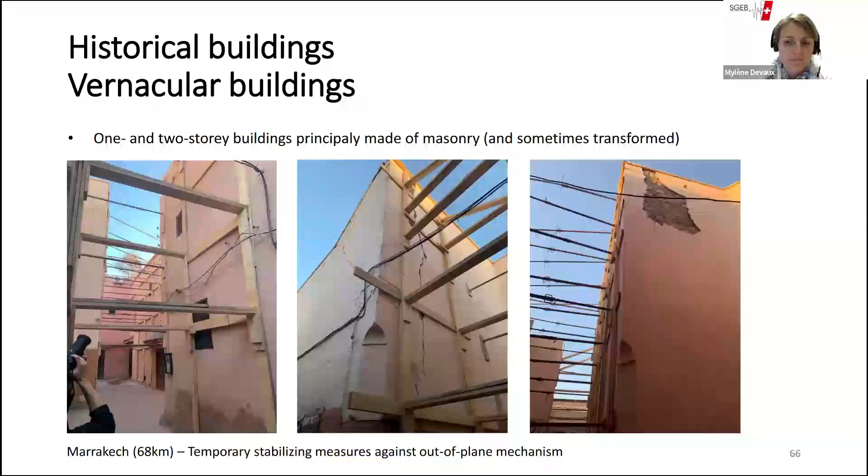Now, regarding historical buildings other than vernacular ones, for instance sacred buildings like mosques, we observe that most of the minarets had either suffered very serious damage or had simply collapsed, and that the rest of the mosque structure showed significant damage. There is no point in showing rubble, but there is a point in showing buildings with light to moderate damage. To illustrate this, I have chosen to present the cases of the Koutoubia Mosque and Kasbah Mosque in Marrakech.

In the case of the Koutoubia Mosque, we can see that the minaret, which is quite high, something like 80 meters high for a square section about 10 meters long, is still standing and shows very light damage visible from the ground where we were. Unfortunately, the pinnacle had suffered serious damage, which is why we can see a kind of belting structure put in place after the earthquake to stabilize the structure. There are also shoring placed all along the outer walls of the mosque to stabilize them against horizontal movement.

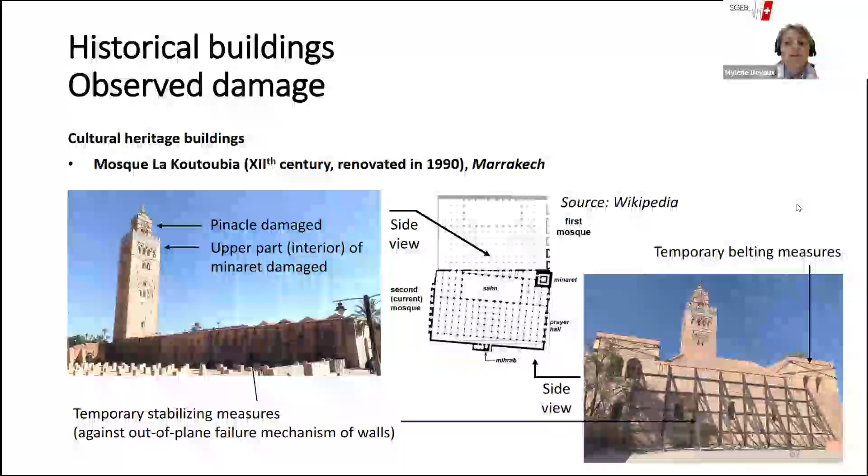As a last comment, I would like to add that there were no visible cracks at the interface between the minaret and the rest of the mosque structure, which was, for me at least, quite surprising because both structures, I mean the minaret and the rest of the mosque, must have had different behavior under seismic action. So it's quite surprising not to find any crack at the interface between both parts of the structure.